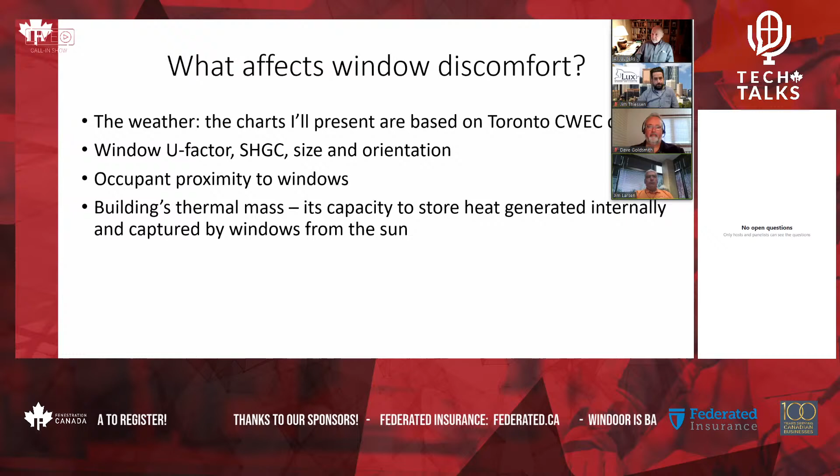Now, a lot of people will suggest that maybe that's too high, but if you want to go with 20 degrees C as your set point, recognize that a third of the people are already uncomfortable. You've already failed the ASHRAE comfort standard, and that's why I set it at this point for the beginning.

So, next slide, Al. Yeah, and these are the parameters that the standard uses to evaluate comfort. Is that right, Jim? Yes, they are. So, I think I was going to say here that the important point for everybody is don't get hung up on the specifics of what the assumptions are here or what the particular results are.

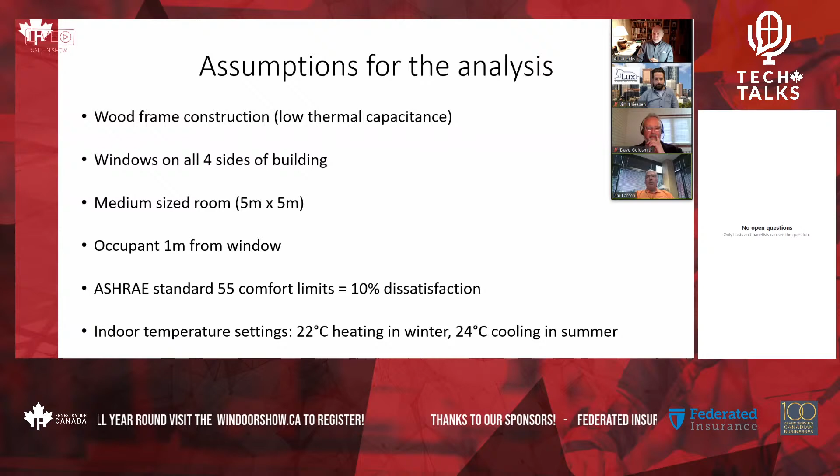Yeah, it is a statistical analysis. It's not going to answer the question for you individually if you're comfortable or uncomfortable, but for a large population of people, what's the general response to the thermal conditions?

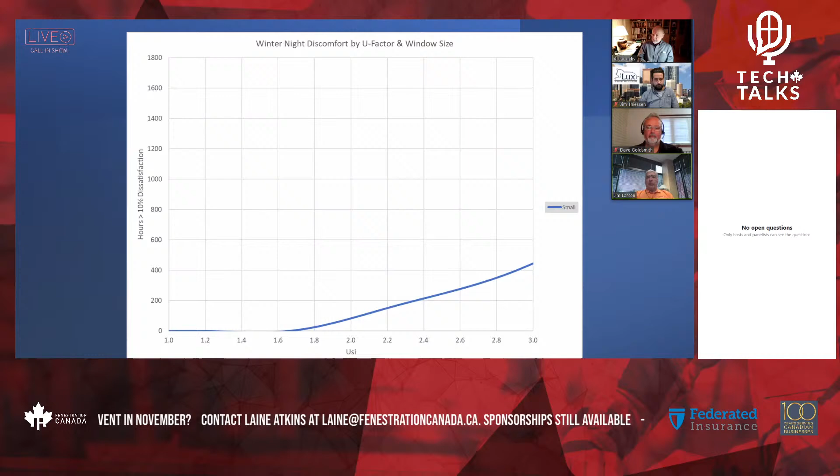Great, thank you, Jim. Okay, so the first slide I want to show here: on the bottom axis is the U factor of the window. So we're going from, in essence, double pane clear over on the right here to triple pane double low-E over on the left here. The vertical axis is hours of dissatisfaction where you've exceeded that 10% threshold.

And the legend here says small. Oh, by the way, this is winter night, so there's no solar involved in any of this yet. We're just talking about the influence of ambient outdoor temperature. Small window in my definition here is one operable window in the wall. So it's going to be 10 to 15% of the wall area.

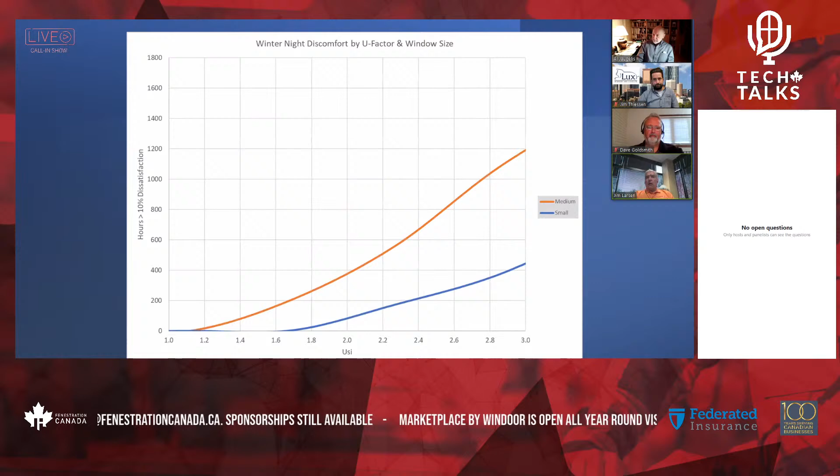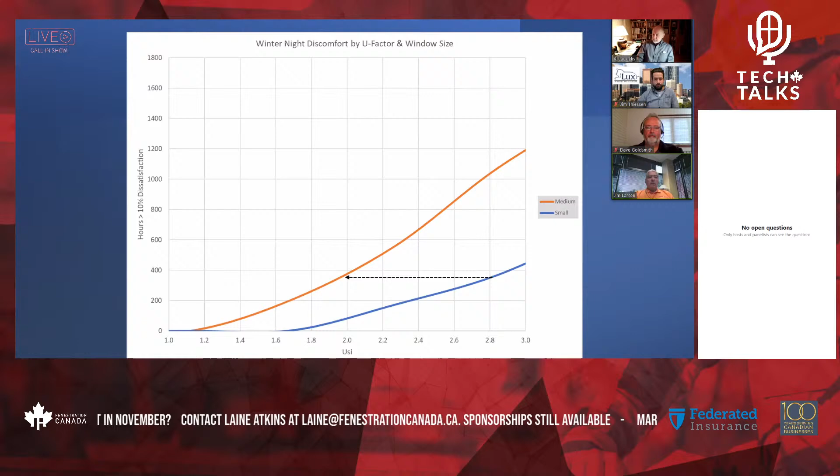Next slide. So now if I double that, if I go to two operable windows in the wall, I'm calling it medium. You can see the impact that has on the hours of dissatisfaction. Click once here, Al. What this line is trying to suggest is that if you go from one to two windows in that wall, you'd have to go from a U factor representative of clear to one representative of low-E in order for that to deliver the same comfort.

I'm not making a judgment as to whether that 350-some hours was acceptable or not, or that's the threshold you want to design to, but look at the comparison. More windows requires lower U factors to deliver the same comfort level.

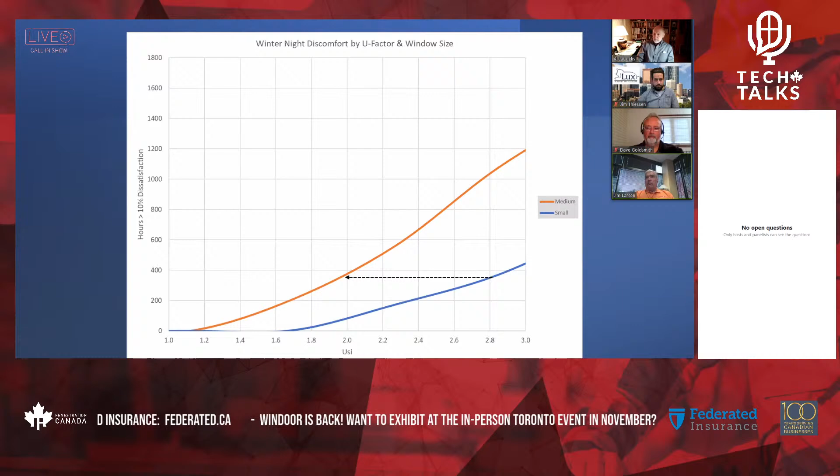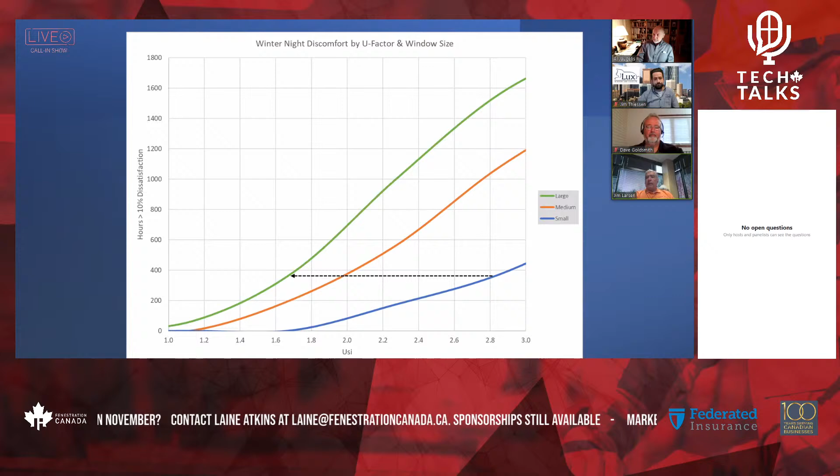Next slide, Al. And last slide here on the winter night is taking it to a large window grouping. I've now put 3 operable windows in there, so it's something on the order of 45% of the wall area. And you can see going across there that we're starting to get close to a triple pane window to deliver that same comfort level. So it's the comparison there on what you need to deliver the equivalent comfort that's really important.

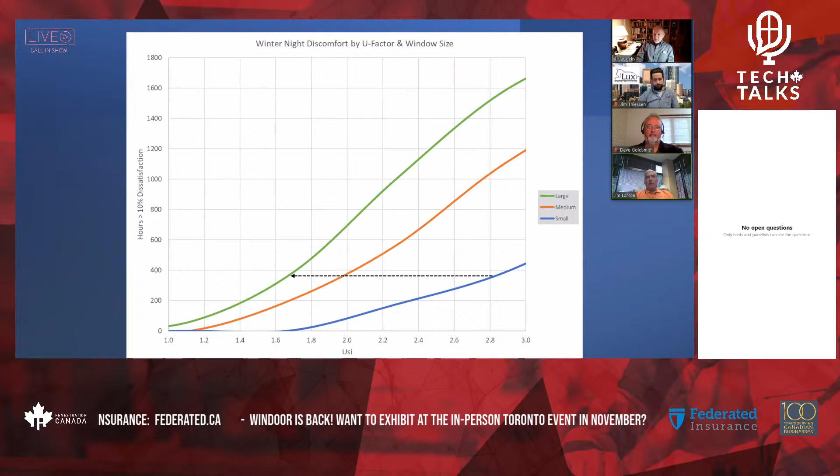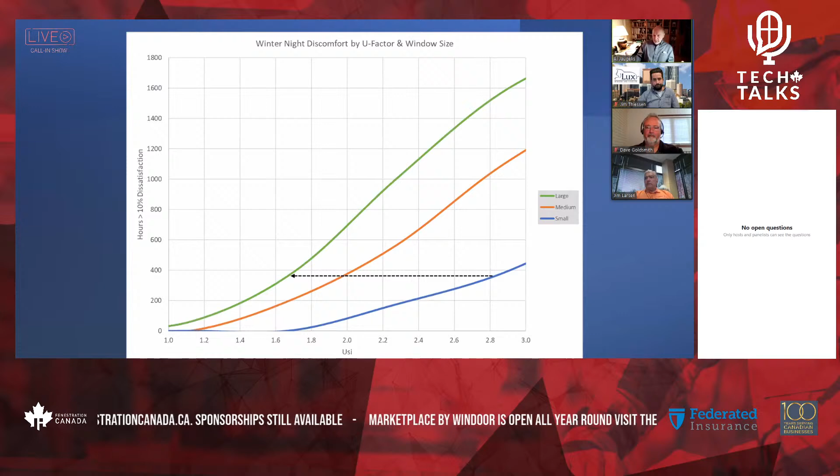So, the takeaway then is that the more glass area you're going to have on that wall or in that room, the colder a person will feel with the same window, right? In other words, the same window technology. Exactly. So if you're starting out with just a double glazed clear window, the bigger that window gets, the more uncomfortable you'll be. And to maintain the level of comfort you would have had with a small window, you need that larger window to be significantly more thermally efficient in terms of U factor.

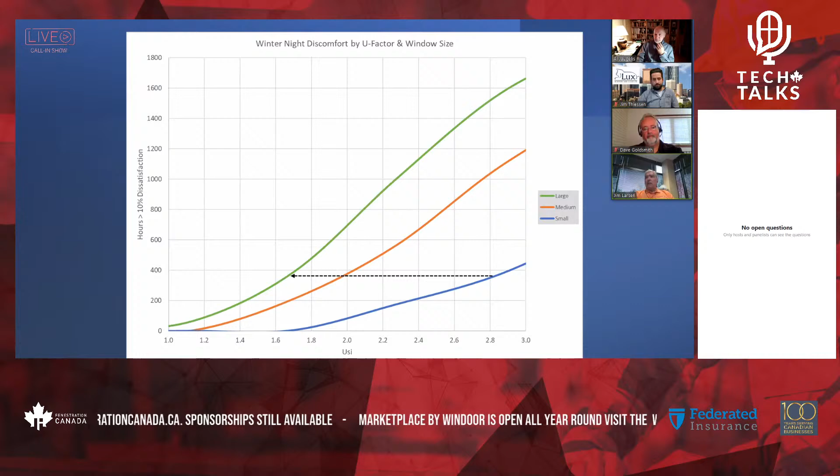Now we could accomplish the same thing that this graph is showing by moving the person away from the window. Right. That's another potential comparison you show here, is that I could take the large window grouping and say that at 3 meters away, that same window will have the same comfort level as the small window at 1 meter away. So all of these interplay with each other. So I'm fixing those in this scenario here and just playing with the window area or the window size here in this first level of comparison.

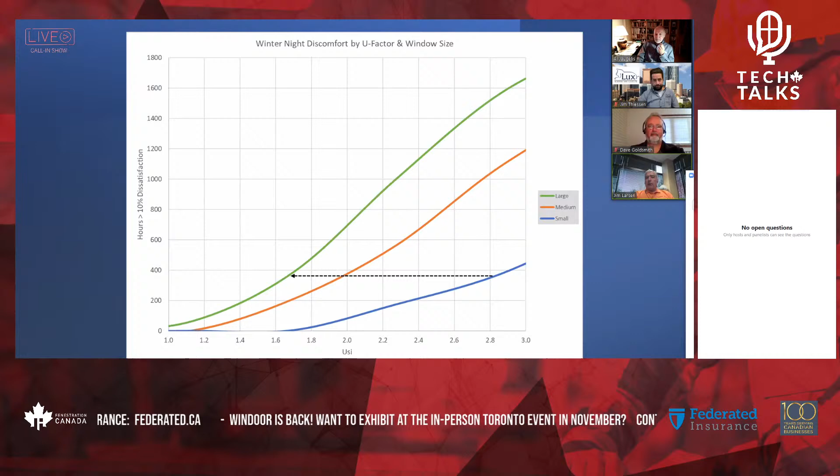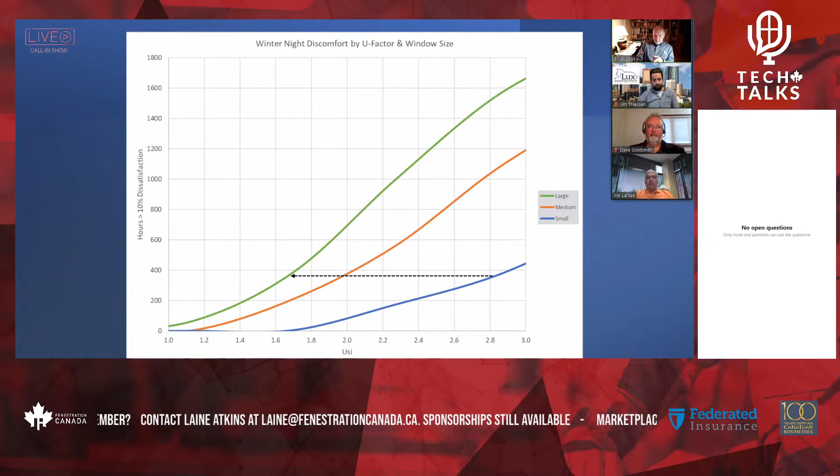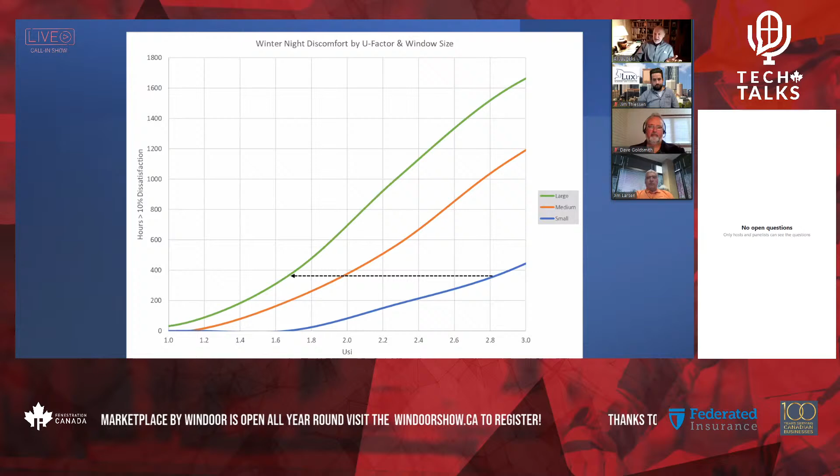So we can see by the vertical axis of this chart that if you've got that double glazed clear window on the far right-hand side with a U factor, metric U factor around 3, you're looking at potentially thousands of hours of dissatisfaction. Is this now over the entire heating season, over the entire winter, or? Well, this is over the entire year. Over the entire year. Okay. It's doing an entire year analysis.

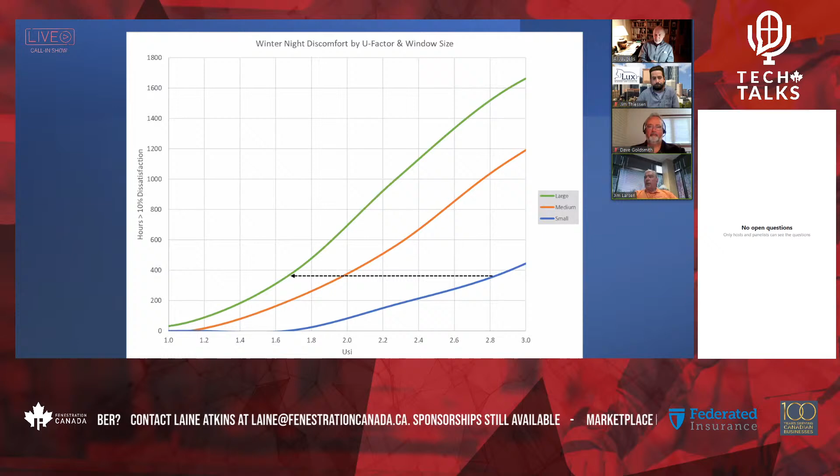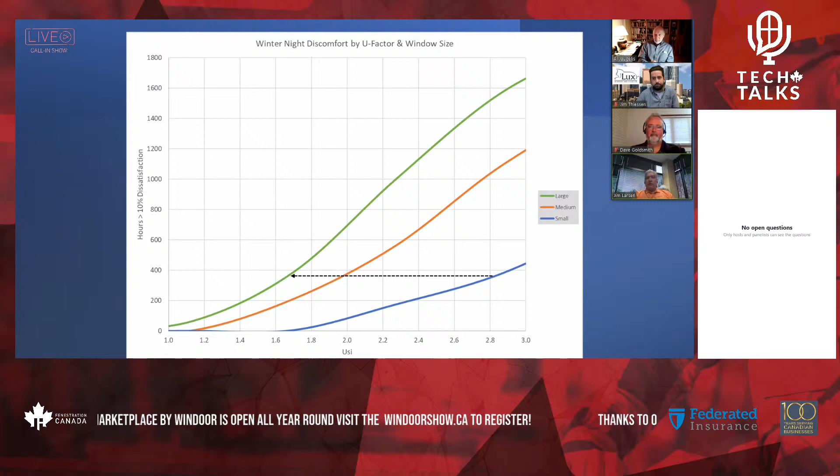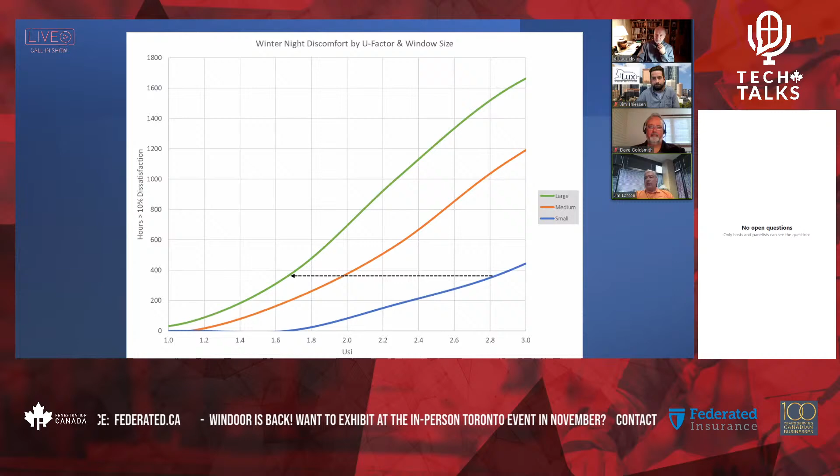Think about what we do for design temperatures for buildings. We talk about the 1% temperature threshold. So we do 1%, 99% in the wintertime, and then 1% in the summertime. Well, 1% of a year is about 88 hours. So put that on this vertical axis here, the amount of time that you're dissatisfied as opposed to the dissatisfaction level that we're setting for a threshold here, and this is proportioning out to be a pretty specific, pretty impactful amount of hours then.

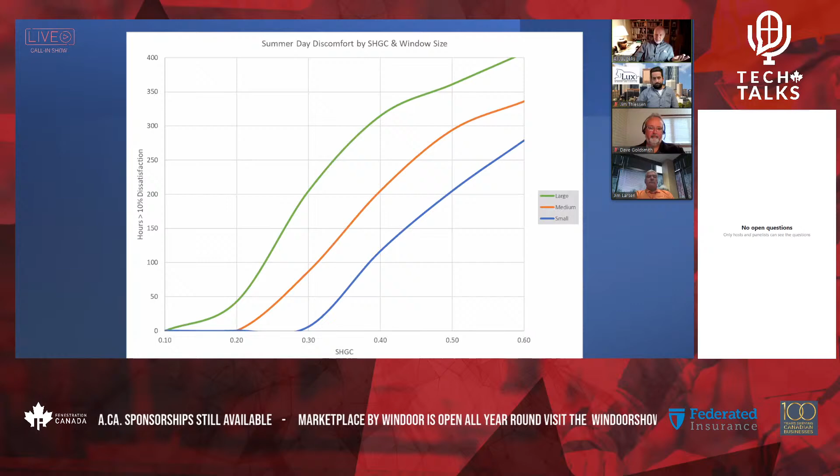And so a level of comfort that you would have, where could we draw a line through this to say if you were comfortable with a 0.4 solar heat gain or a 0.5, how does that translate to the window size? Well, I think again the same type of comparison would go on there. If you pick, we're going to be okay at 200 hours, you could do up to a 0.5 solar heat gain with a small window, but you'd have to be at a 0.3 solar heat gain with a big window. Right. So each individual will respond somewhat differently, but at these particular points you'll have different requirements for the window.

I saw a comment come through on the chat about, is the sun perpendicular to the window? This is calculating the hour by hour solar angles on north, east, south, and west, and then proportioning that to the extraterrestrial radiation. So it is the net solar gain on the face of the window multiplied times the solar heat gain then. And the solar heat gain coefficient here, is that center of glass or whole window? I'm putting this in context of a whole window, Al. Right.

Okay, next slide. So quick summary on all this, because the other pictures we've got coming up here are actually more important than this, is that the window orientation matters. If you're going to talk about passive solar designs, you're only talking about the south side of the building. The south side gets sun in the winter. The east and the west get sun in the summer. The north virtually gets nothing. So you have to control what orientations you're glazing, as well as your building thermal capacitance and stuff when you get into passive designs.

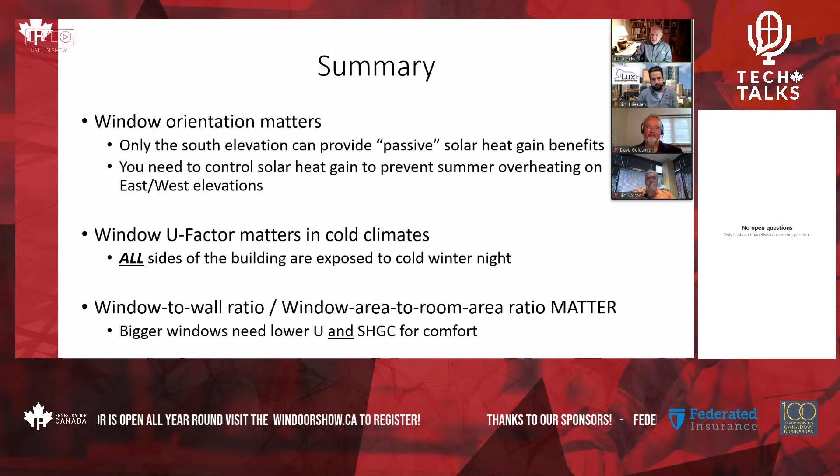So I think the idea that, well, we should just put high solar into all the windows, it might make sense in some energy model that bins the total number of heating hours over the year, but from a human comfort perspective, east and west are not the places you really want to be harvesting solar heat. And we're going to see what happens when you do put high solar on east or west in our upcoming sessions. So let's move on to our next guest, Dave Goldsmith.

You're going to give us an example of a home where occupants were dealing with cold discomfort. You betcha. So go ahead to the next slide. So this is the photo that was sent to us by a customer. They're at a development to the west of Calgary called Cottage Club. This customer is a very astute individual, and he made some observations. I'm going to read portions of the email that he sent to us. It was one of these 10 pagers.

He says, currently our home is extremely uncomfortable once outside air temperature drops below -12 or 14 Celsius and is almost unbearable when we hit -20 Celsius. Trailer park living at its finest. The windows I was sold are simply not fit to purpose and function. My observation is pretty simple. I did not ask for triple pane as my 30-year-old double pane windows at my acreage I just moved from are built to the same or less robust standard than your windows. I placed a lot of trust in professionals that I assumed after 30 years and every federal, provincial, and municipal agency's insistence of ultra-high thermal efficiencies in new homes that dealing with what I am dealing with right now would only be in a bad nightmare.

So this picture was taken at an outside air temperature of -18 degrees Celsius and an inside air temperature of +19 degrees Celsius. And he says the furnace runtime averaged 25 minutes, followed by 4 minutes off. He also mentioned that his previous home was an acreage with a total of around 6,500 square feet. That includes 1,150 for the heated shop, 770 for the heated detached garage, and over 4,500 for the house. And he has 4 furnaces for that. The square footage for the cottage is 950.

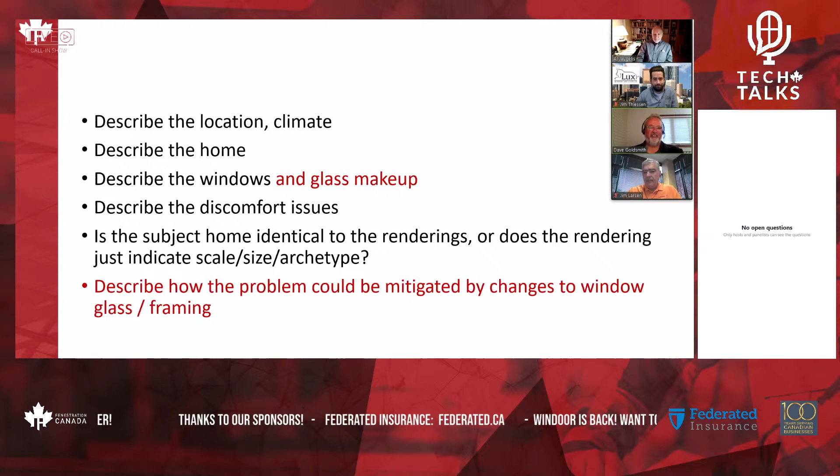He just knew that this house was not designed and built properly with respect to comfort. So next slide, Al. So what he said about the square footage of the home put a little light bulb on in my head. And I remembered back to my engineering training at U of C, where they talked about something that was ubiquitous in nature and in physics, which is what you would call a scaling factor.

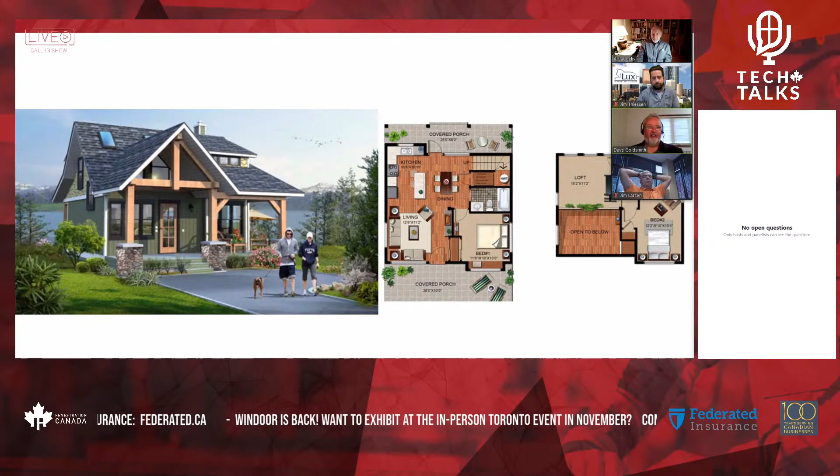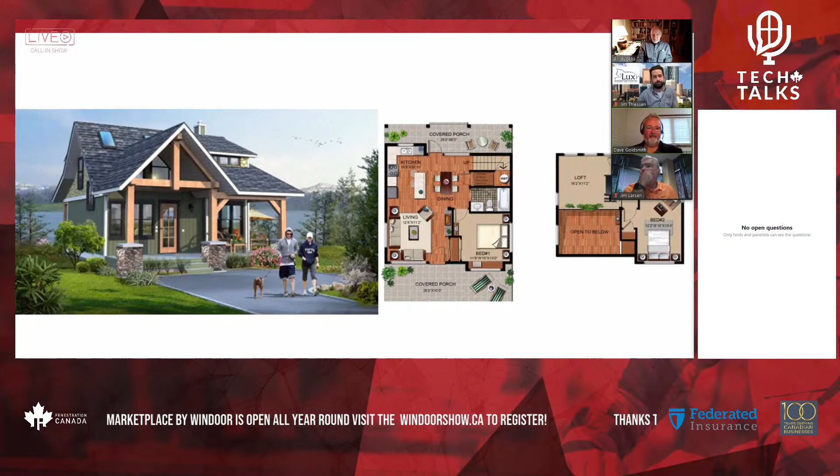On the other hand, if you're living in a crate that's 1 meter by 1 meter, it's going to cool down very, very quickly. And this is the reason why this fellow's furnace is on 25 minutes and off 4 minutes. It's simply because the volume of the air in the building is so small, and the surface area of the building that can shed the heat, and particularly the surface area of the windows, is so large.

If you look at bedroom 1 on the ground floor right there, and imagine sleeping in that bedroom, and there's a big window by your head, another big window off to the left of the bed as you lie there, and it's minus 20 out, and God forbid it go down to minus 30 out. You're probably going to need an electric blanket to sleep in that bed. And these are basically the facts of life, the facts of physics. Next, go ahead, Al.

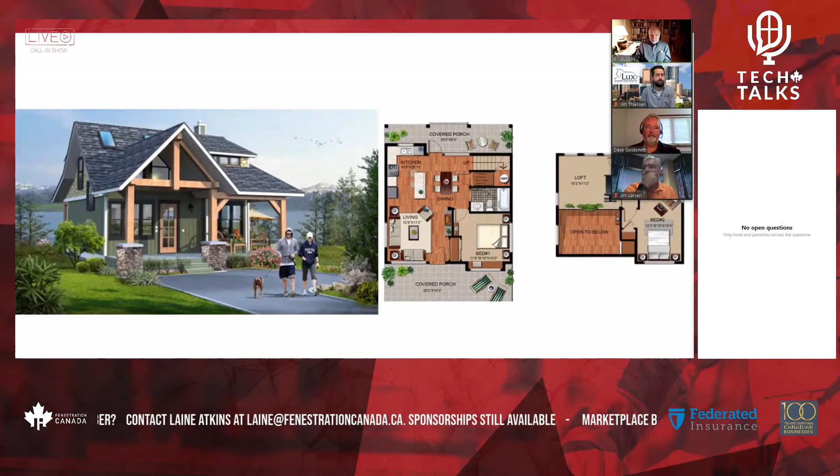Yeah, so I guess windows that would have been perfectly satisfactory in a large home, where the surface to volume ratio was probably very low, those same windows could be very unsatisfactory in a small home, a tiny home, where the surface to volume ratio is much greater. That's correct. Right.

So it's not the same thing that Jim was talking about, but in some ways it's a similar concept: there's a lot of surface that you can lose heat from and not a lot of volume, not a lot of heat storage capacity inside that space to retain that heat. So you've got it, Al.

So do we have a next slide, Al? Yes. And so, yeah, these were the takeaways, actually, that you just described. So we've got here: the smaller the home, the greater the surface to volume ratio, and the windows will tend to have more influence on occupant comfort. The larger the home, the lesser the surface to volume ratio, and the windows will tend to have less influence on occupant comfort. And the greater the glass surface to floor area ratio, the more influence window glass choices will have on occupant comfort. Absolutely.

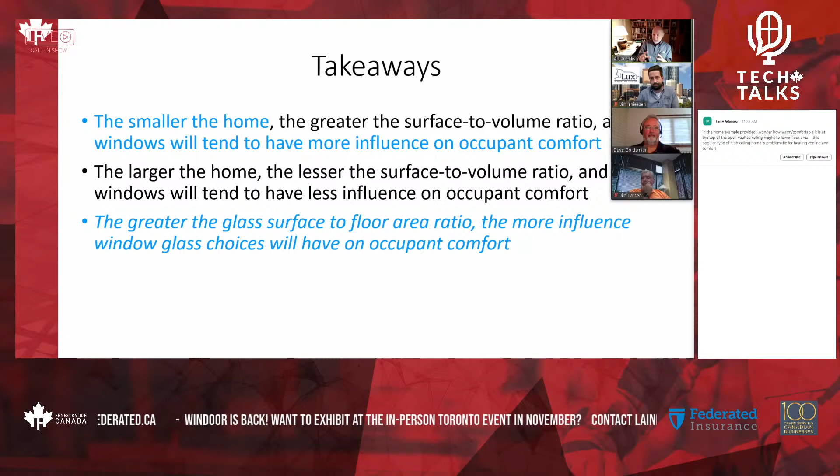So essentially, by looking at a very small home, the problems are magnified here. What could improve the cold discomfort of this homeowner? It's interesting that he explicitly chose not to go with triple pane windows based on his experience in the large home, which suggests that maybe the builder was suggesting he should have triple glazed windows, and he just thought, no, I won't need them. Yes, that's right. Would that have helped? Well, it certainly would have helped. And in hindsight, he really should have used the very best, very lowest U-value windows available on the market. Something like a triple glazed with 2 low E coatings. Even that might not completely ameliorate the problem.

When you think about what your U value is on a window and how it compares to R value in a wall, there's a reason why we quote windows based on U value and not R value, because try telling your customer that it's got R40 walls, that their window is an R5, and if they order the very best window available on the market, they can get that up to R8. It's just the windows are the vulnerable point in the building.

So I think the builder, just like the customer, is relying on the industry and the perception that legislation has made buildings and windows much more thermally effective in recent years, and that something that meets code is going to be satisfactory, and that's a false assumption. But the builder doesn't know, the customer doesn't know. The ones in the know are people at Fenestration Canada and the people on this call now, judging by the types of attendees. Fenestration industry seasoned veterans would have some understanding of this, but nobody else does. And I have to say, when he said that we made shit windows and we should have known better, that kind of got me a little bit. As an industry, we're letting these people down.

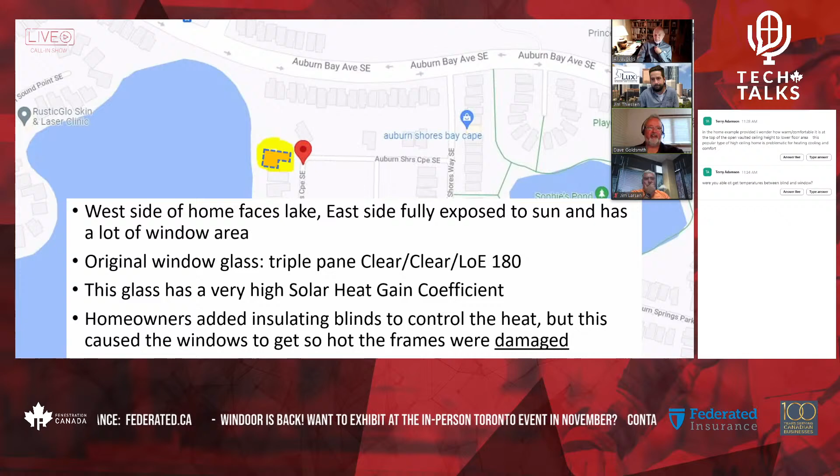The answer to that would be there are different vinyl compounds that can get you up to like 90 degrees Celsius, but they are 4 times the price of a standard vinyl compound, because we had to look at that just for our parting stop on our patio door.

Yeah, further to that, all the mull connectors on the interior of that window and the screen retainers had shrunk almost a whole inch. So that was one of the things the service tech was so baffled about, how parts that left our building touching each other had now shrunk a whole inch. And it's like Dave said, that extreme heat can just shrink that vinyl. And that is true. That is certainly true.

So it sounds like the kind of glass you would normally have recommended if somebody asked you, Jim, would have been something like the LoE 270 clear, LoE 180, which would provide significant reduction of solar heat gain, but also result in a high degree of occupant comfort. Yeah, that's a go-to configuration here at Lux. We do a lot of 270 clear 180, and we also do a 366 180 I89 on occasion, which is quite a Cadillac piece of glass.

In fact, when the dew points are a certain way, we get some exterior condensation on the outer pane in those scenarios sometimes too. So it's almost so extreme in the other direction that you get calls from the opposite end: why are my windows fogging? Well, it's insulating so well that that's causing your outer pane to be that cold, right?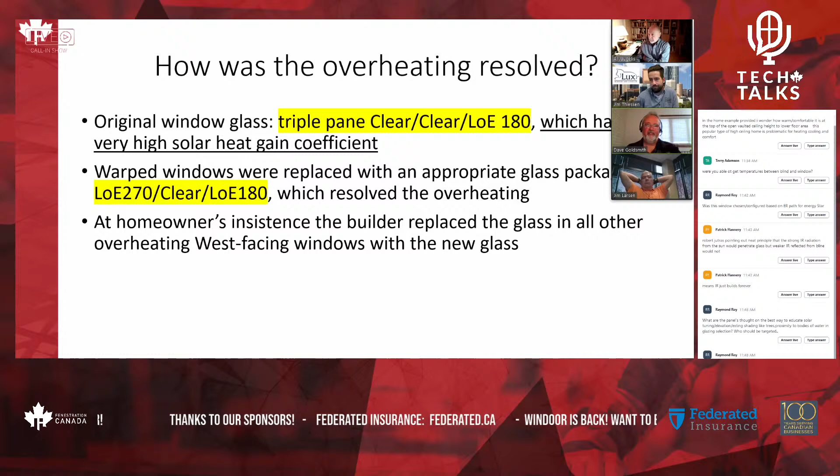Or if we could publicize them after the fact with links that salespeople could send to various customers to try and educate them, I would say that would be a bold move, rather than just us continually discussing it amongst ourselves. I think what I would like to do, and this is maybe a project I'm going to give myself for the coming year, is summarize this information into maybe a 2 or 3 page document that would just provide people with guidance on these subjects.

How do you choose window glass with these various things in mind, with comfort in mind, with energy in mind, with respect to orientation, whether you do or don't have external shading, whether you're completely exposed to the environment. If you're in a subdivision and you're boxed in with small homes all around you, you might never encounter these problems. Your window to wall ratios might be smaller, and you may not get a lot of direct solar from any orientation, and you've never had a problem with a window in your life.

And then you move to a new subdivision in Calgary, and you've got your lovely retirement home on the lake, and all of a sudden you're living in a nightmare, because you've made your choices based on past experience, not understanding that the environment you were in protected you from a lot of issues that you are now exposed to. And you just didn't realize that your windows would be affected in any way.

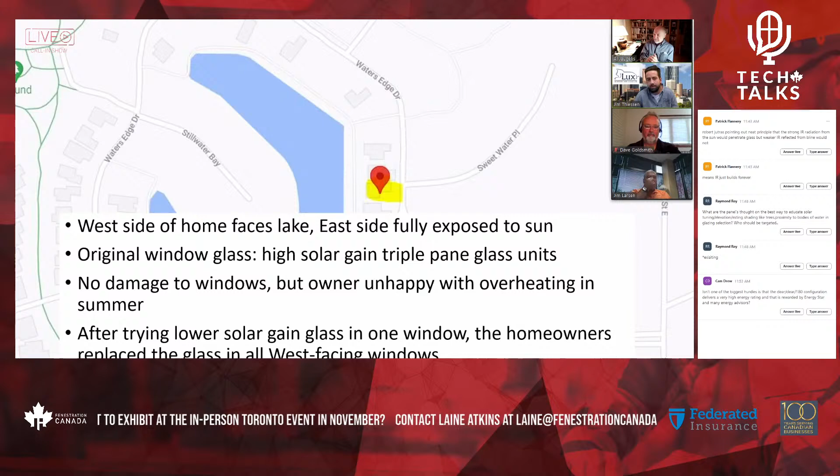Jim, let's take a look at your second home. I think it's really very similar to the first one. Yeah, very, very similar. In fact, the same home builder, the same configuration of windows and glass, just this time a little less drama, no window that's beyond repair. In this case, the homeowner simply called us and said, do you guys have glass options that will help keep a room cooler in summer? And we offered to the homeowner, we said, if you're going to do this, try one room.

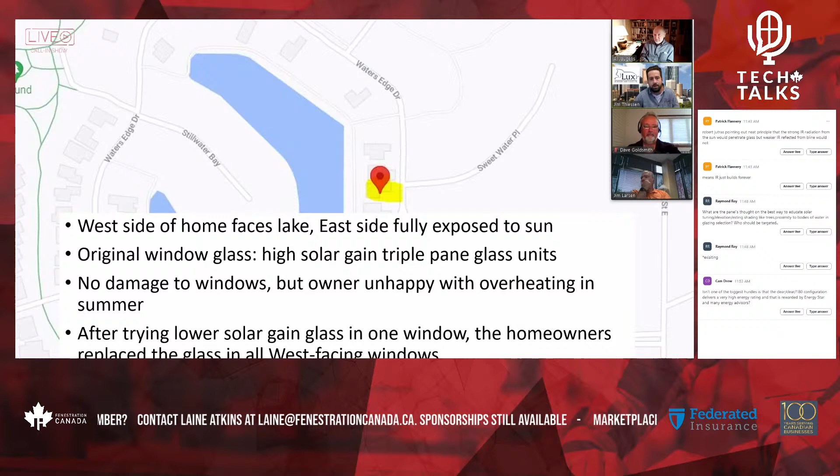And we recommend 270 clear 180 and try one window in one room that you know is problematic, and then proceed with more. So the homeowner did that, and it didn't take longer than 2 or 3 weeks again for him to call back and ask for the additional room. So in this case, it was less glass that we changed. It was, I think, 3 combination windows, and they were all facing west, again facing a man-made lake. So very similar geographically, window configuration, size of home. Yeah, in this case, just a little less drama with the window not being destroyed.

Right, yeah. And in this case too, did the builder pay for the upgrade, or did the homeowner? No, in this case, the homeowner just paid for it directly. Okay, yeah. So I don't know if you guys are still dealing with that builder. Hopefully he's ordering different windows from you in the future. Well, yeah, different product line. We were hoping that this educated them a little, but they don't buy from us anymore.

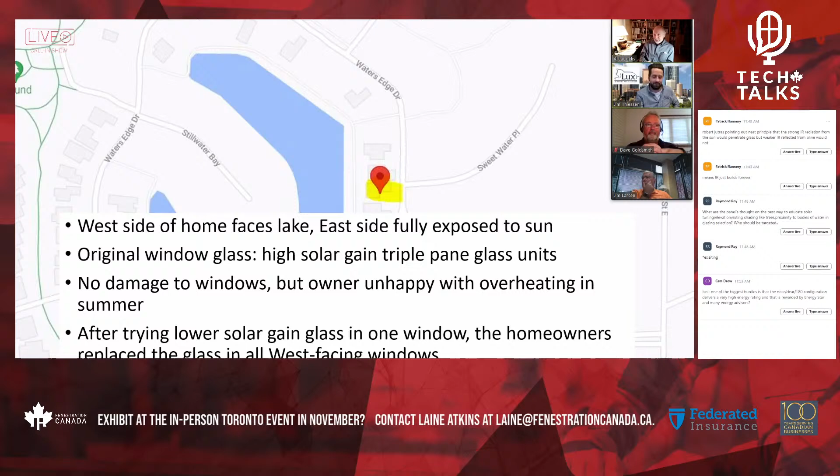So they might be in Dave's world nowadays. Great. Yeah, we bounce them back and forth. Yeah, we do, right? Unhappy customer, here, you take this guy for a while. Yeah.

But well, let's try as an industry to have less unhappy customers and to maybe have more discussion. But again, you know, it's tough. It's tough when a builder's working with an energy advisor, and the energy advisor is recommending something like, "Hey, we're going to go high solar here. I'm going to save you money on your house," right? One of the groups that we need to educate about these issues are the energy advisors themselves. Now, there are energy advisors that understand all of these issues very intimately and are very skilled at what they do.

But the demand for energy advisors right now is so great in Canada with the Greener Homes program and other incentive programs that they can't train them fast enough. And a lot of them do not have the experience and they don't really get trained for their jobs. They don't really get trained in selecting windows for comfort. It's not really on the curriculum. And so the temptation is just to see them as sources of free heat with no negative consequences. And that's something that, again, hopefully we can help to address as an industry, is to help them understand. At this point, I'm not sure.